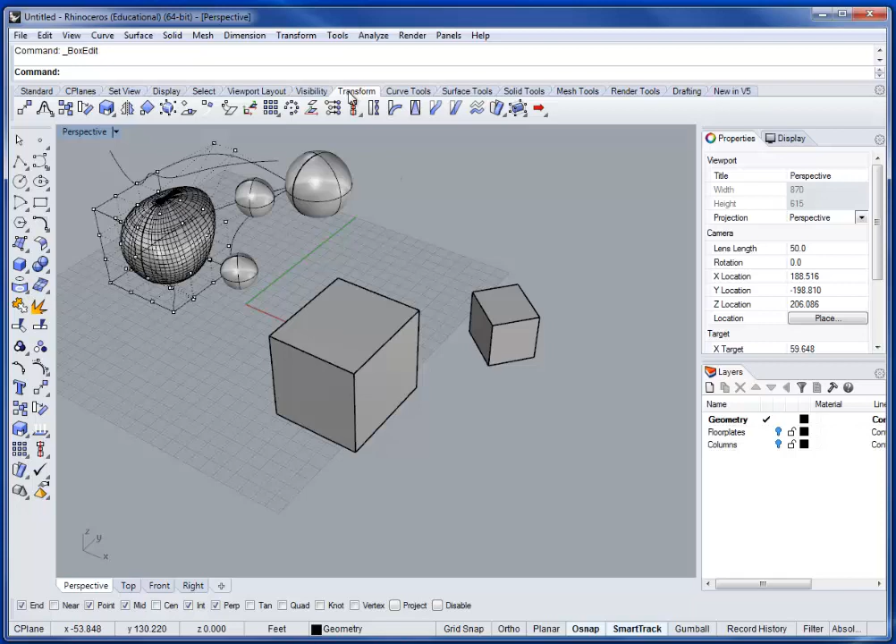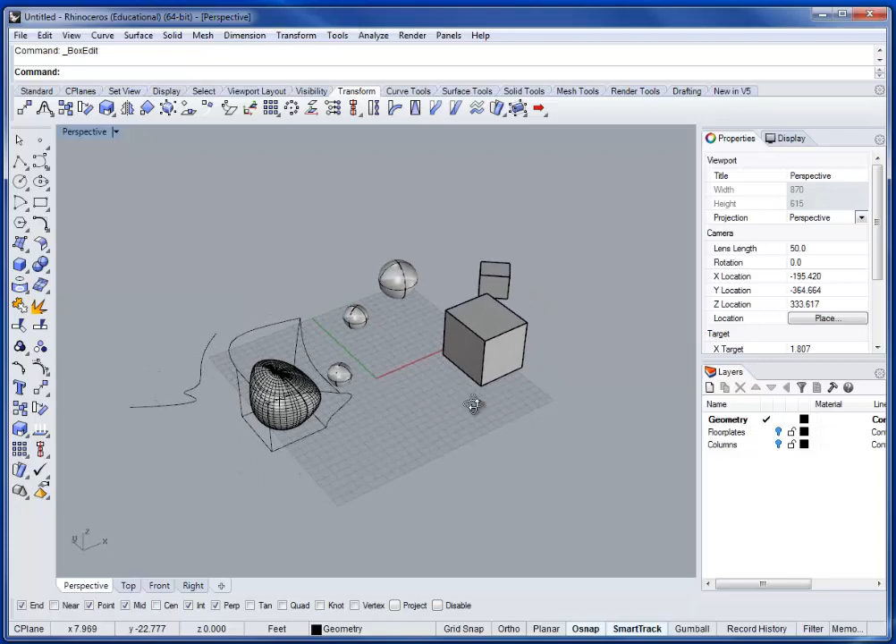This tutorial is going to go through the transform tab in Rhino 5. I've got the transform tab up with a bunch of tools running, but you should notice I've pulled out the layers tool and put that beneath there. It took a little massaging, but that way you can revert back to the old Rhino 4 way of looking at the properties of an object and adjusting the layers simultaneously, without negotiating a bunch of different tabs, which I find kind of obnoxious.

So the first thing we'll do, we'll just move right through this. The move tool, obviously we go through like that. The soft edit curve tool is essentially taking curves and turning on the near snap, then allowing you to grab that as a knot and move it around, which is really handy if you're doing some massaging.

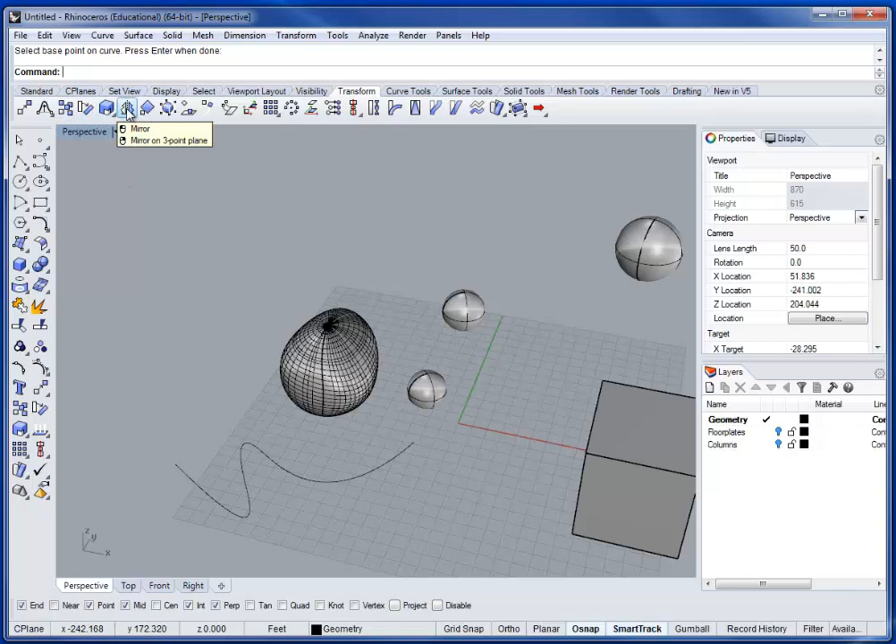There's copy tools, rotate tools, scaling tools, mirroring. You set the mirror axis and then it mirrors the geometry.

The orient tool is actually kind of new, and I don't know that it's all that handy, but if we come in here, we rotate. The way that works is you set a reference point on the object and then you reference that same set of points on the geometry.

And come here, left click, so we can orient from there to there, and we want to orient that from that to that. So we can start to connect objects. That's a little more handy as you're trying to set something up for 3D printing, or orienting and connecting things that you know should connect.

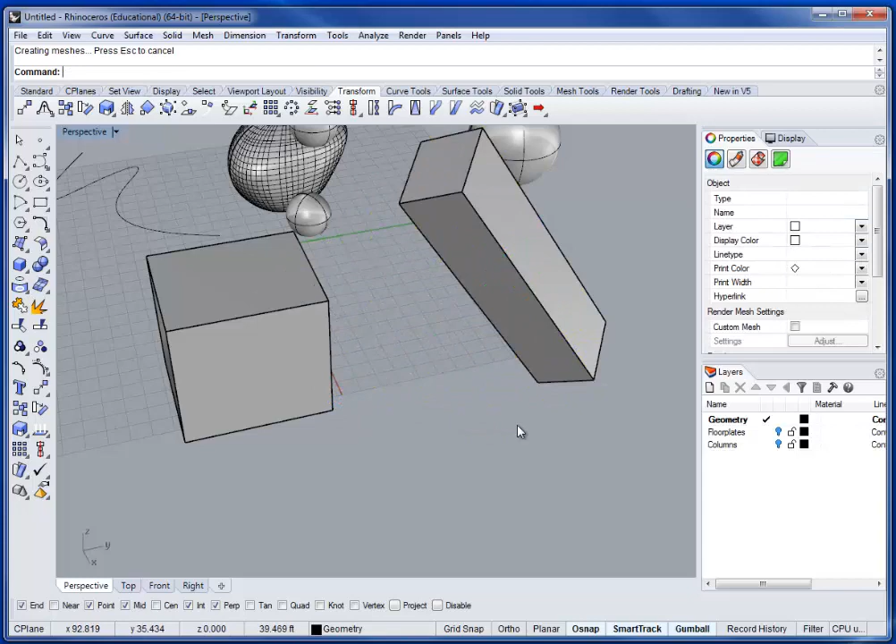The box edit tool, this is, I think, completely useless, but I'll show you what's in here. This enables you to scale, rotate, and reposition the geometry. If you really want to do this, I recommend turning on the gumball edit, which gives you the ability to rotate, scale, and move those geometries with a lot more ease and intelligence.

The difference between the two is that with the box edit tool you can type in numbers. If you know the scaling distance you need to adjust, you can do that from that edit menu, as you can see right in here. I've got to select the geometry for this. So we come in here and we can scale that, and adjust the increment that it actually operates at.

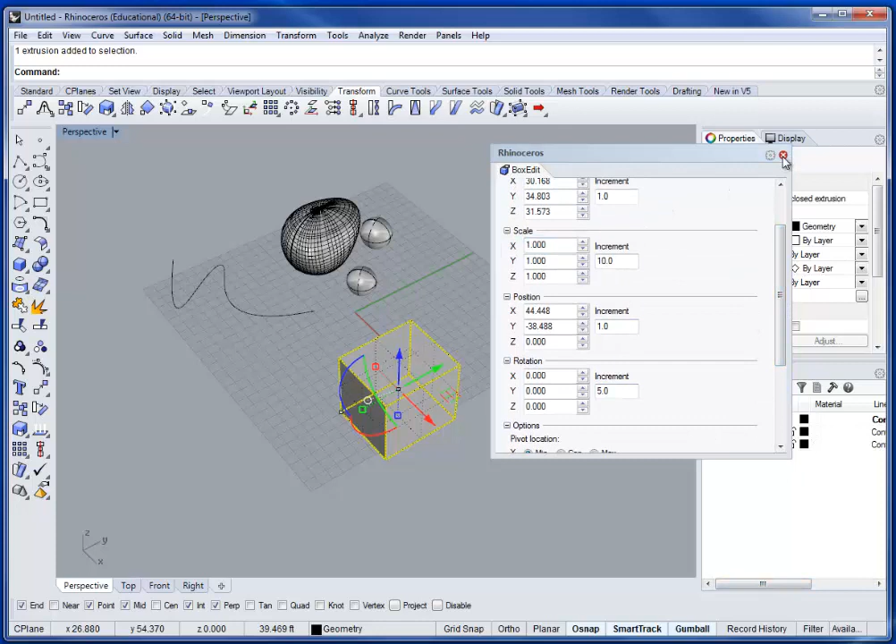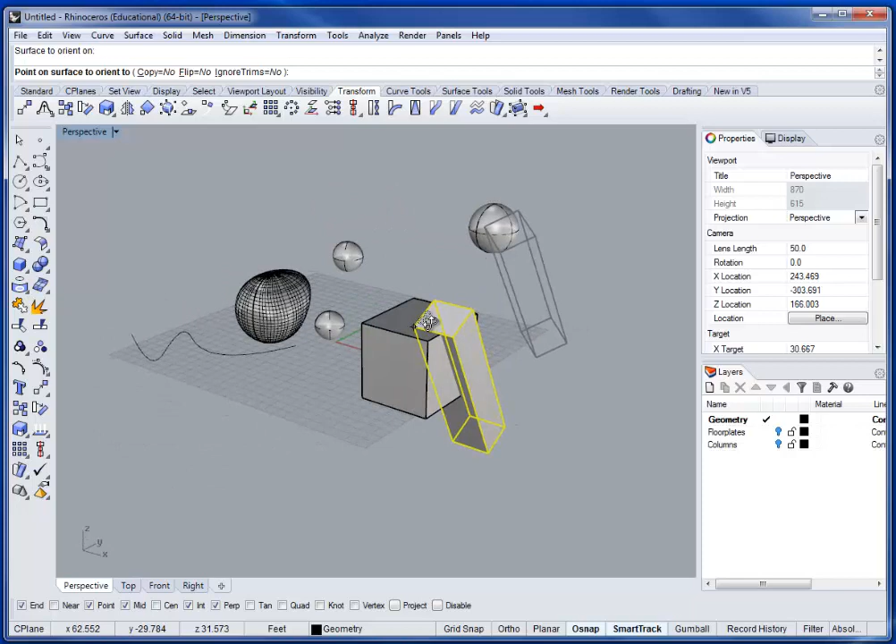Moving along, you can orient objects onto a surface. So we go here, select the base point, select the reference point, and then you can see how that's connecting those references to those geometries. A lot of this you'll end up spending more time doing with 3D rotations, and you can orient perpendicular. I'll let you guys explore some of this stuff.

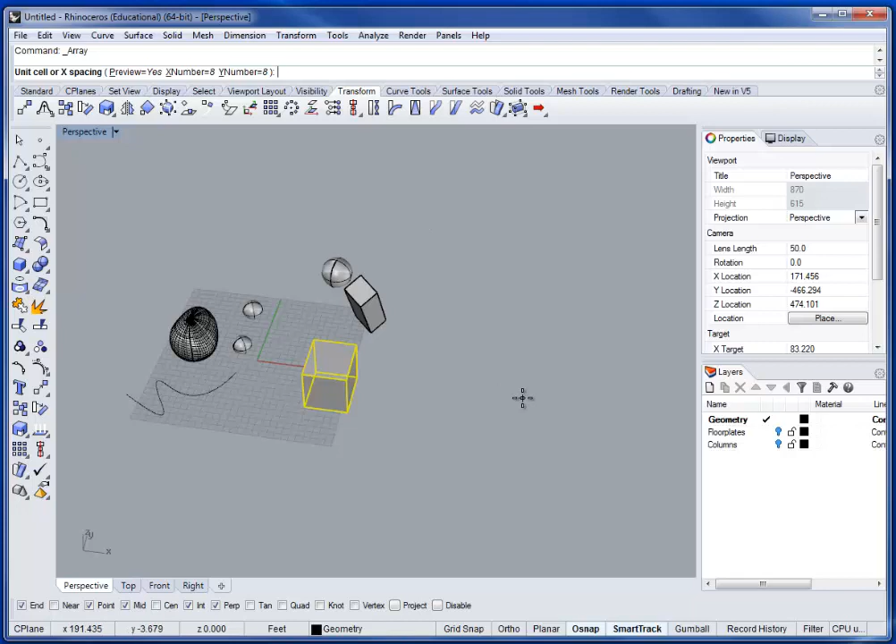But then we can also do arrays. This is handy if you want to do one, two, or three-dimensional arrays. So 8 by 8 by 1 - I'm not going to go three-dimensional because it tends to slow down the machine. My geometry is pretty big, so we'll just set that to 20.

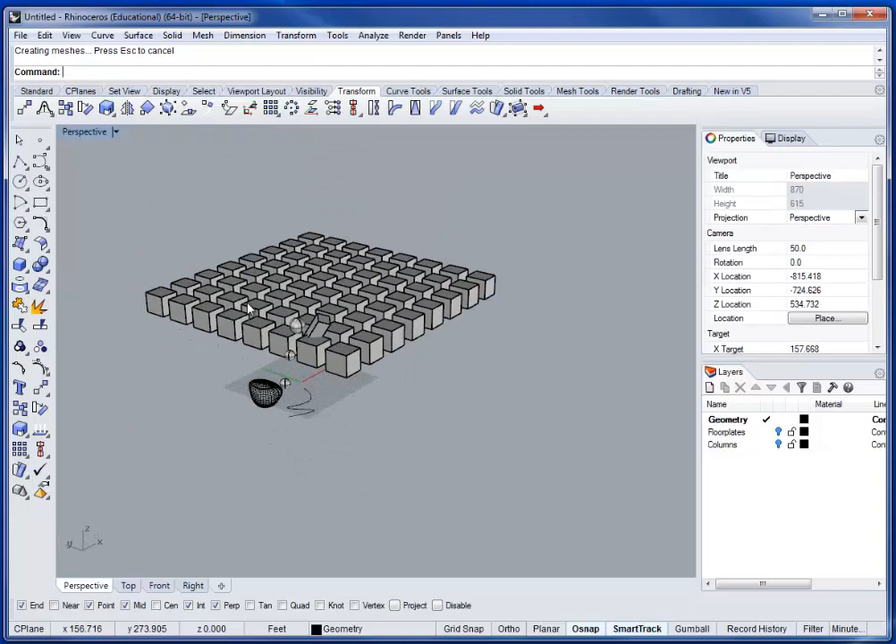The geometry isn't created until you confirm that. So we can change the spacing, we'll put that up to 50. Okay, that looks like what we want it to look like - say we're building a really monotonous city. We can come in, and now each one of these is its own geometry.

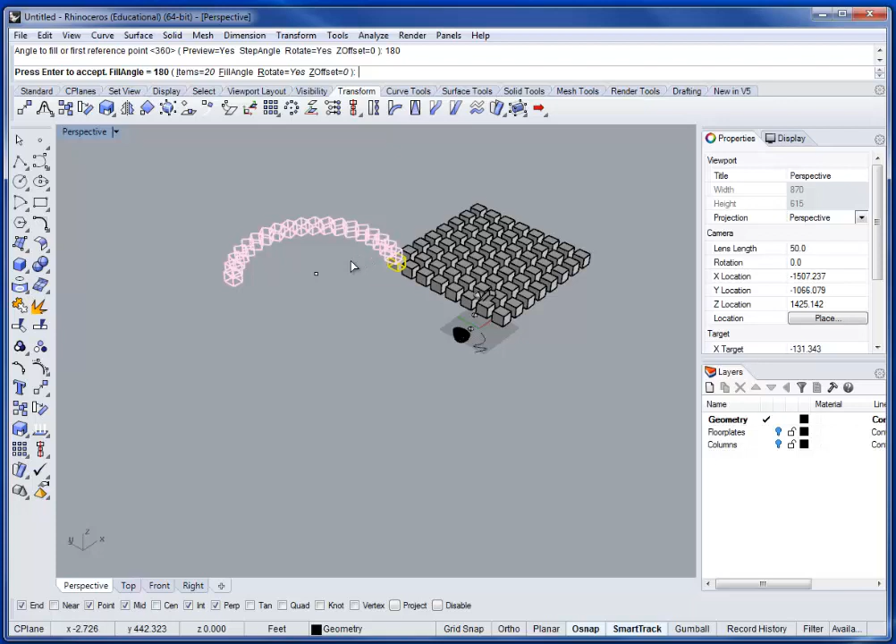From there we can also create polar arrays. There's a center, and we can have 20 objects divided among, then you set the angle division. So we want only around 180 degrees. It does it 180 degrees and places those geometries appropriately. Then we can change the number of items, change that, rotate - yes, all that.

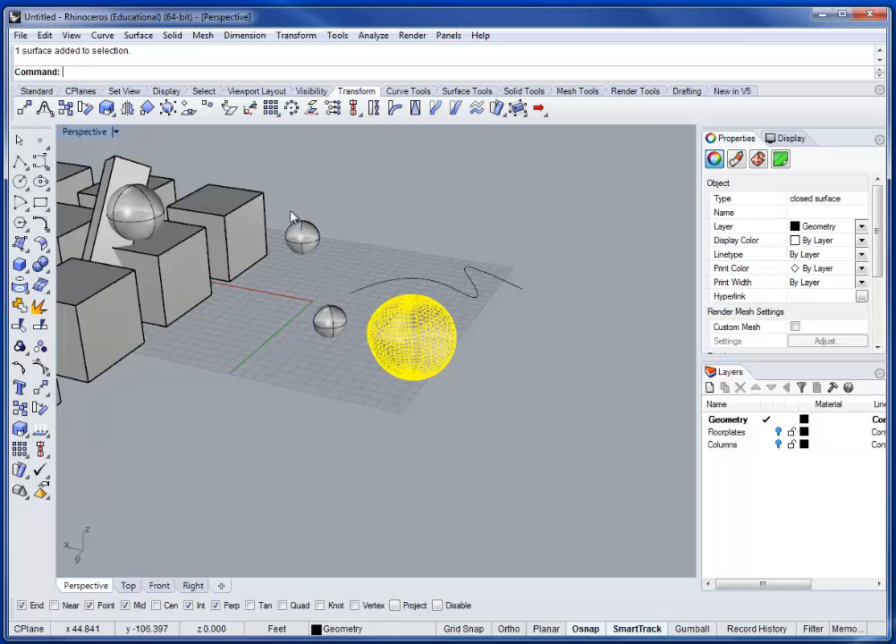As we look at some of these, we can project geometries onto the construction plane. So if we take this, it's sort of like a Make 2D. This is actually really more handy when you're preparing things for the laser cutter or CNC mill, where you'll have a bunch of geometries floating on top of each other in plan. So if we go ahead and come in here, say we have...

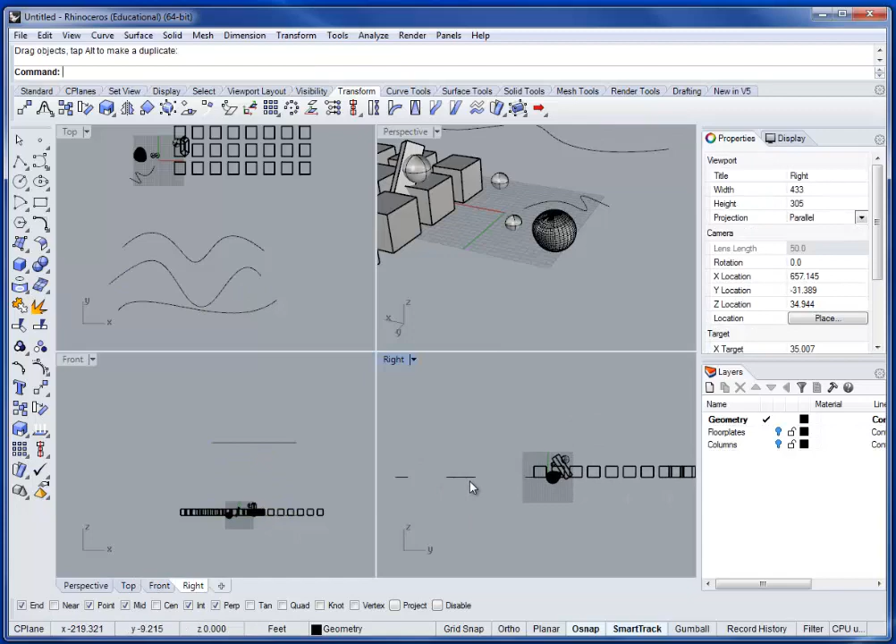I'm just going to create some quick curves here. So as we start to look at this, you need to have geometry oriented for the CAM software to be very specific. If we've been working in plan, this all looks fine and well, but then we actually start to explore the three-dimensional space that it occupies.

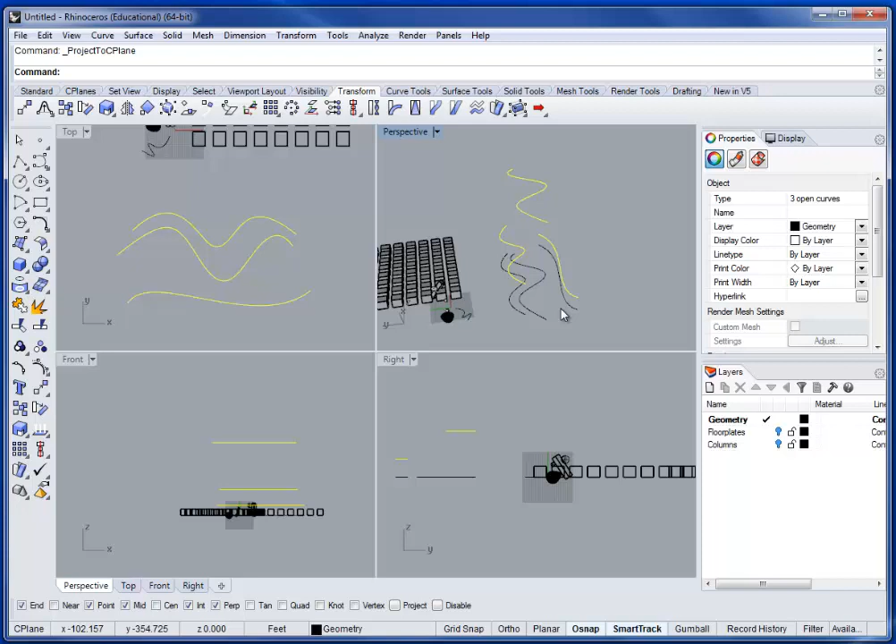You can see that there's a lot going on - nothing's aligned properly in relation to itself. So if we come in here, select these guys, we can orient to the construction plane. By default it will not delete that, but it will make sure you're in perspective or plan if you want to orient onto the ground plane, whatever construction plane you're trying to get that to work in. Okay, and then we can adjust this accordingly if we're trying to get specific heights out of our material.

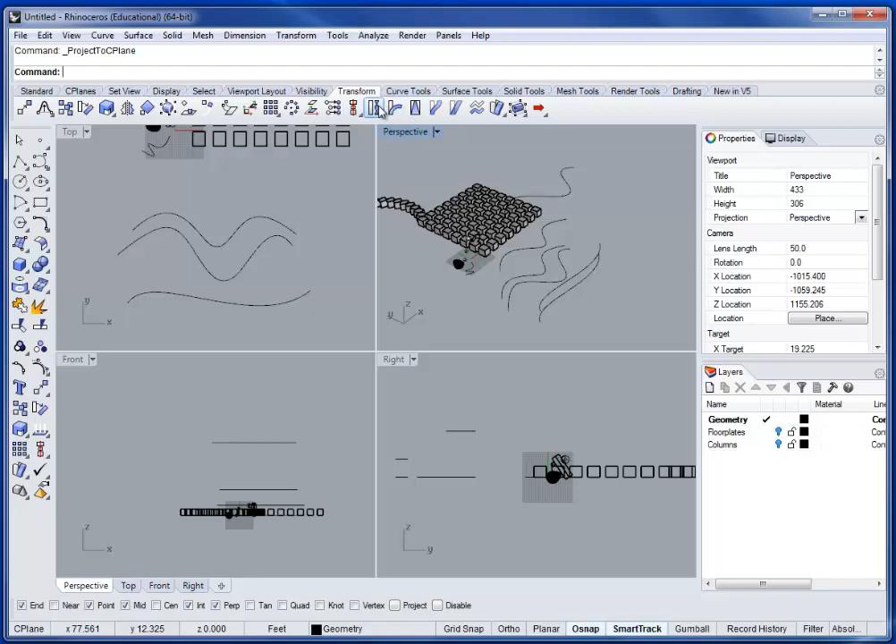We can set the XY coordinates and align objects, but I found that to be not so useful. Some of the other tools in here are a little more useful. I'm going to grab this guy, and I'm just going to delete these.

Selection tools in Rhino work in the same way that they do in AutoCAD. If you select from left to right, it's anything that's inside the window. If it's from right to left, it's anything touching that, and you can see that that's a dashed line instead of a box.

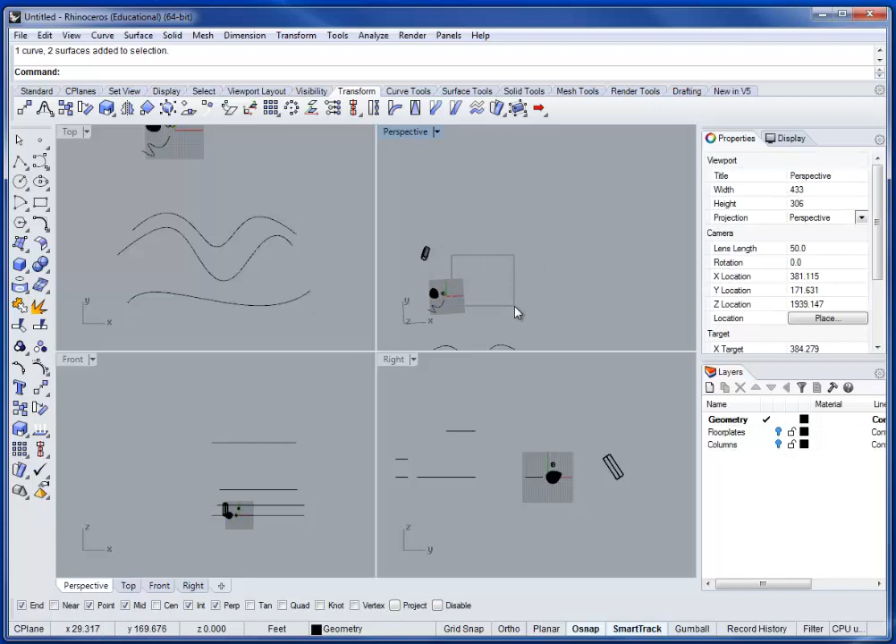So we'll come in here, and some of the more fun transformation tools that you guys will get into, you can start the twist, and it's going to ask you for an axis.

So we define the axis, and we go into plan, and we can set the angle, and then we can start to rotate that around.

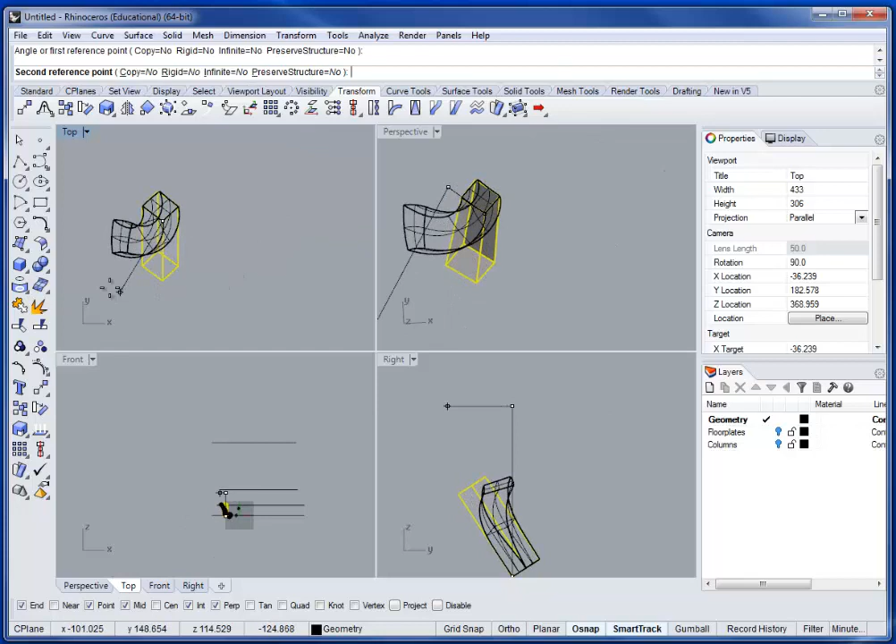It'll automatically rebuild the geometry with a new set of U and V subdivisions. Those are essentially X and Y equivalent coordinates for the surface itself, so if you look at this, each one of these boxes is a U or a V.

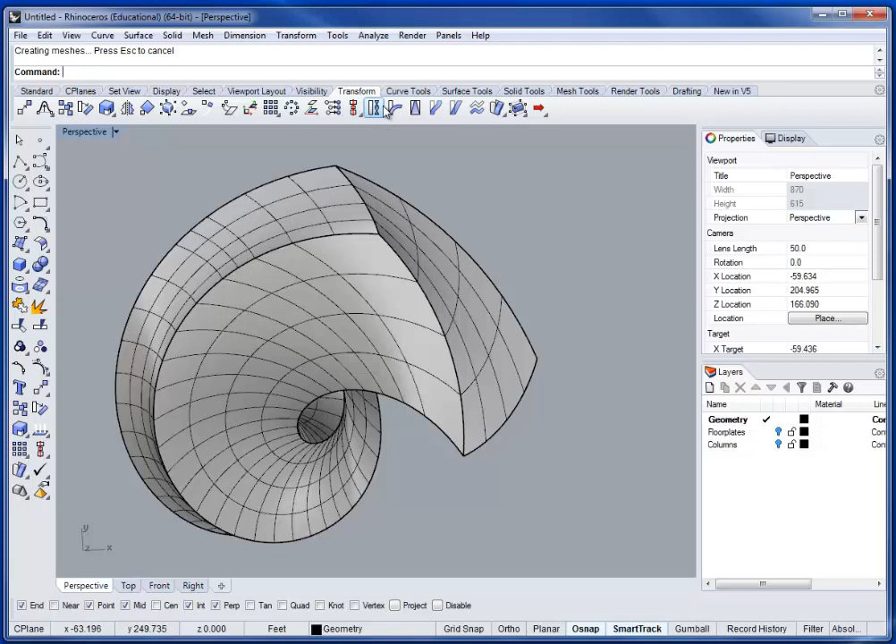So if we want to calculate coordinates on the surface, we do that by U and V. That'll come in handy more when we get into some more advanced modeling and scripting and stuff.

We can bend geometries. I'm just going to see how complex I can make this. Select the objects to bend, and we can set an axis, and then we can bend that around, and again it rebuilds the geometry and makes that more complex.

Be careful as you guys do this, particularly if you're doing this and wanting to 3D print. It will create a mess for you. Eventually these surfaces will rip and tear, and there'll be holes and things won't be 3D printable or meshable, so you have problems with that.

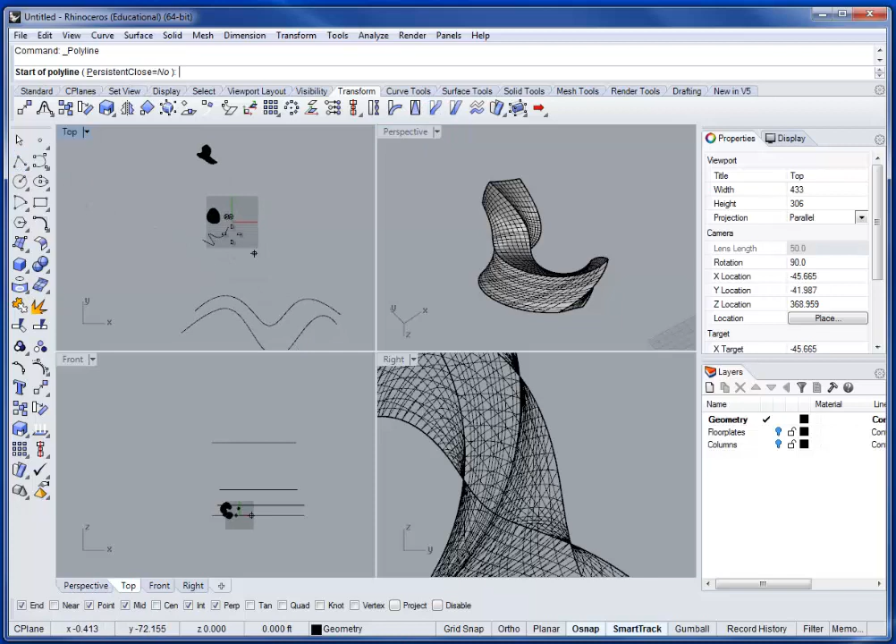Flowing geometry along a curve can also be handy. If you do that, you need to pay attention to the length. So we check the length of this. It's 139.392 feet here, so I'll copy that.

And if I draw a line point, I set that distance. That has implications because now if I want to take an object and I actually want them to remain in proportion to one another, the length of these geometries is the same.

So I'll type in scale 1D, and we'll scale this. And say we want to reflow this geometry along that geometry, so we can come in here, flow along curve.

You select the base geometry that's defining it, and then you select the target geometry. And when you select those, you need to select them near the start point of each.

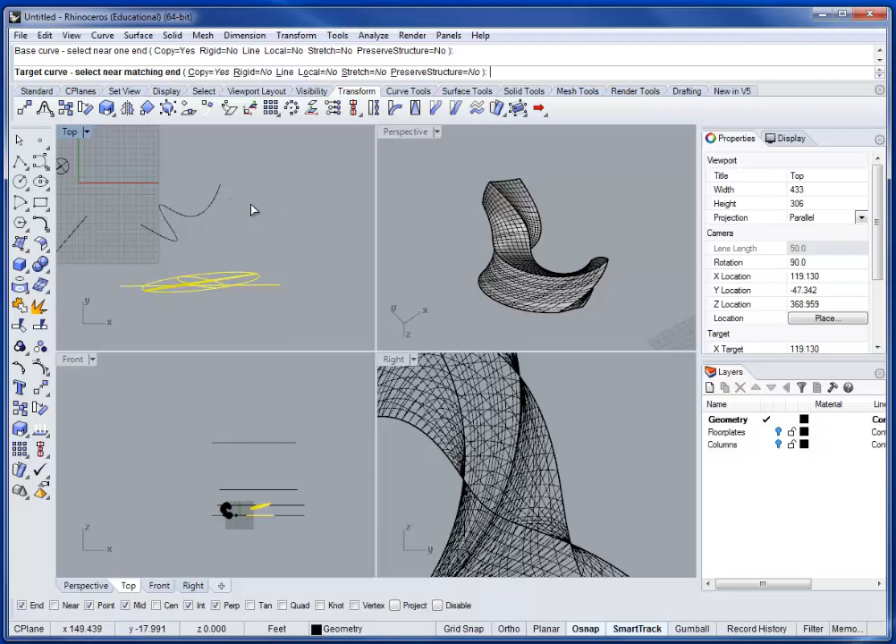So if I clicked on that, then I want it to flow along that, wherever you select that, it's going to orient that geometry. And then we get a nice little slug-looking guy.

You can see this is we're starting to create some pretty intense geometries, but that's what you want. So we can start to do this.

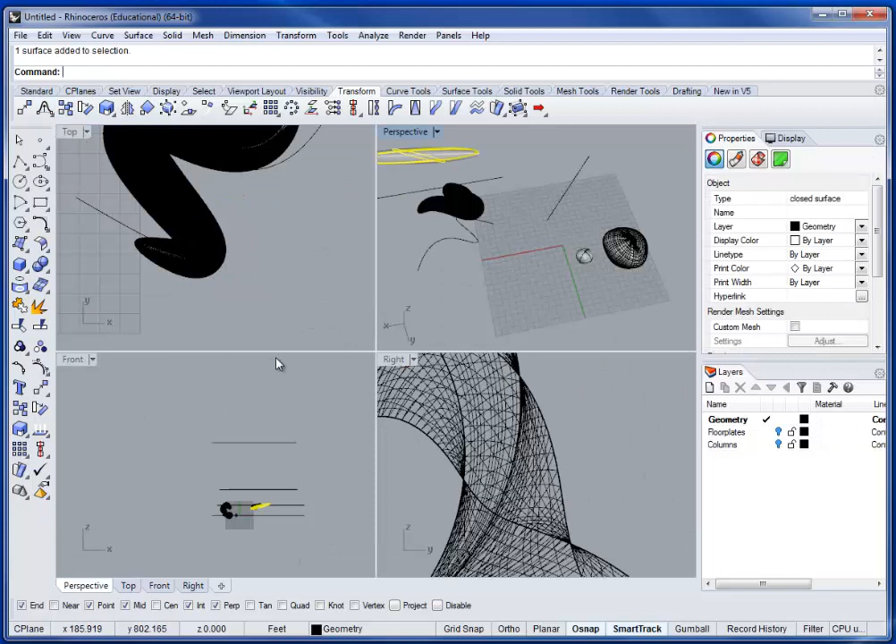If you're not familiar with the taper tool, the symbol essentially is exactly what it looks like here.

Again, this works very similarly to the twist command. We're going to come up, we set a taper axis, and then we set a taper dimension, and then it's going to taper towards that axis. Again, rebuilding that geometry.

Smoothing out, I don't recommend using that all too much. Maybe we'll go through that a little bit more in some of the more advanced modeling stuff.

Flowing along the surface works similarly to flowing on a curve, and I'll let you explore some of that stuff on your own.

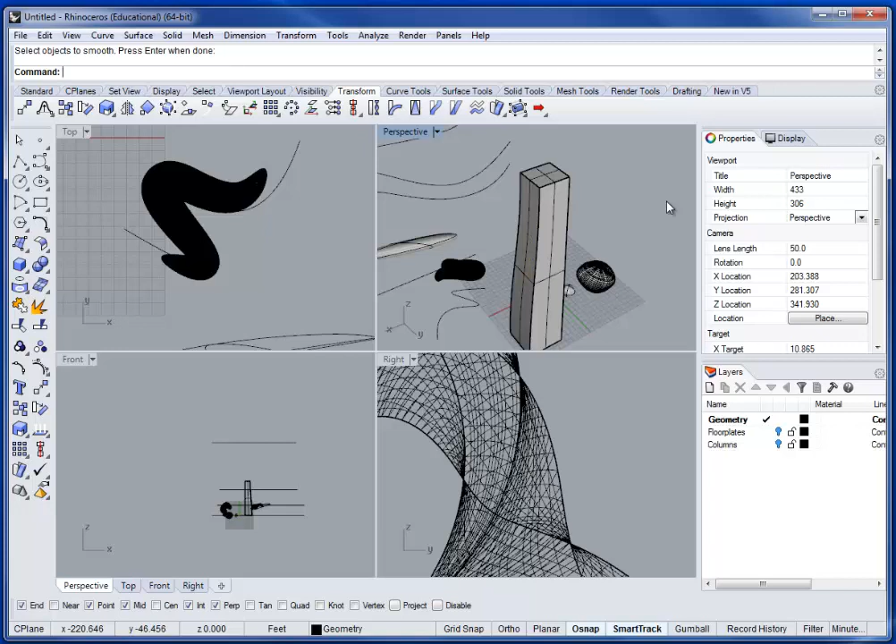The last tool I want to go through here is that this thing's useless. Don't use the move tool. If you want to slightly nudge things around, you can do it that way.

Don't. Be precise. Alright, so we'll turn on the Cage Edit tool. This is going to give us a couple of different options in here. We want, generally, for what I use, the bounding box. That's the space and you'll see it appear here in a second.

We're going to use a coordinate system based on the world. You can also use a coordinate system that you define using the 3-point system here.

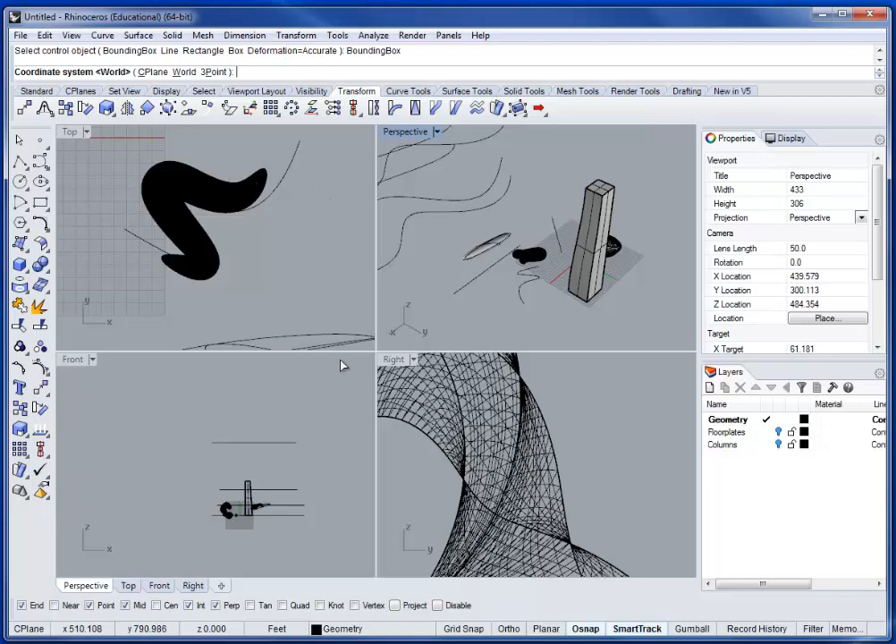Cage edit points, I would just generally leave this alone. It's going to give you a 4x4x4 box, so it'll give you a little bit more. And you'll see this is going to eventually basically look like the warp tool in Photoshop here in a second. And the region edit will make that relative global here.

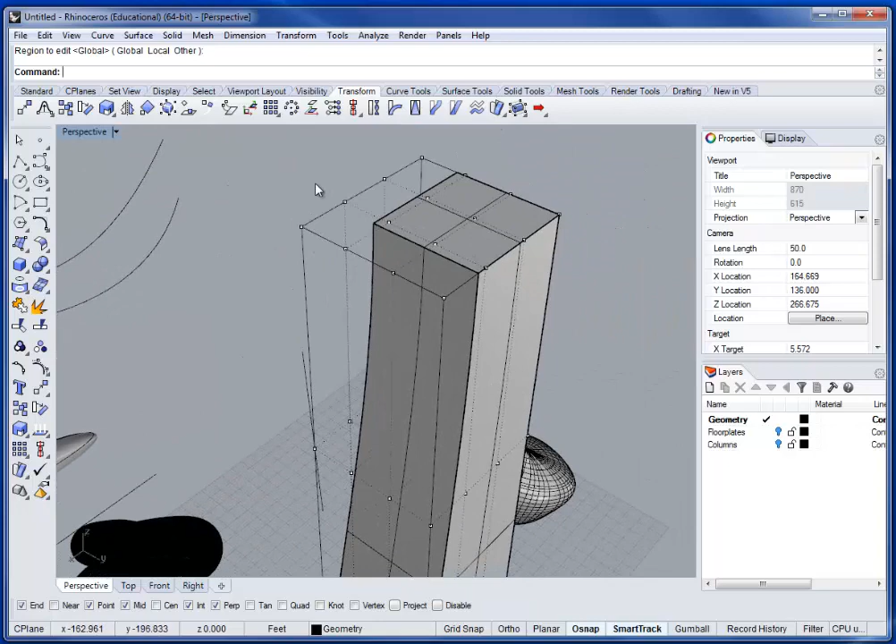So to pull that off, what we can do here is we can start to grab these control points and start to massage our geometries around.

And this is really nice if you're trying to do something where you're actually just trying to massage something, but you don't want to do a lot of really heavy deformations to it.

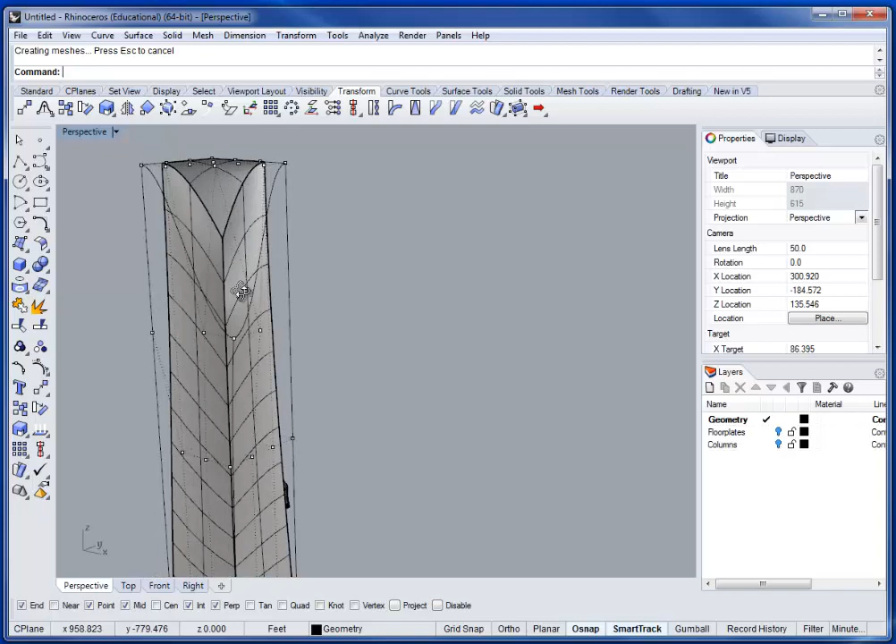So if you're just trying to sort of massage a geometry and you have a base geometry that you know can essentially be derived from, you can start to sculpt that using the Cage Edit tool. All right, and that's the transformation tab.